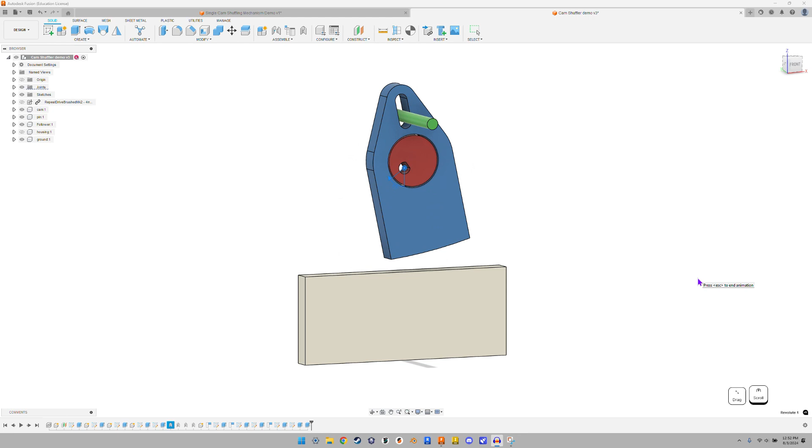Hi, in this video I'll show you how to make this single cam shuffling mechanism. Before I show you how to make it, I'll show you roughly how it works.

As you can see, there are three components: the cam in red, the follower in blue, and the pin in green. The cam is this circle here that converts the rotational motion of the motor, or what you're using to drive it with. It converts that into a walking motion.

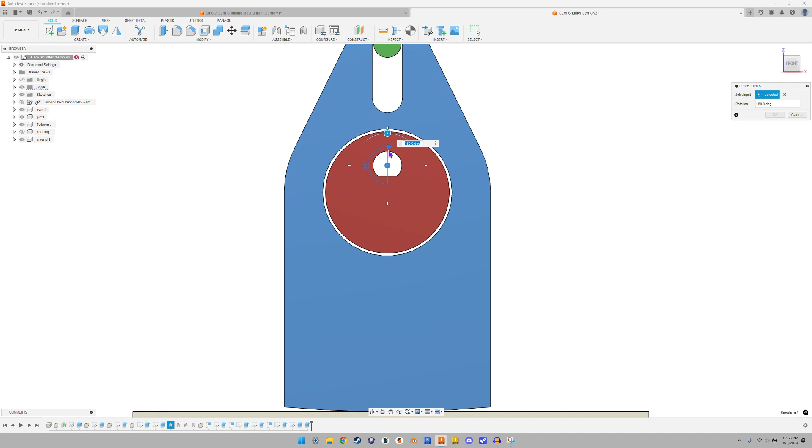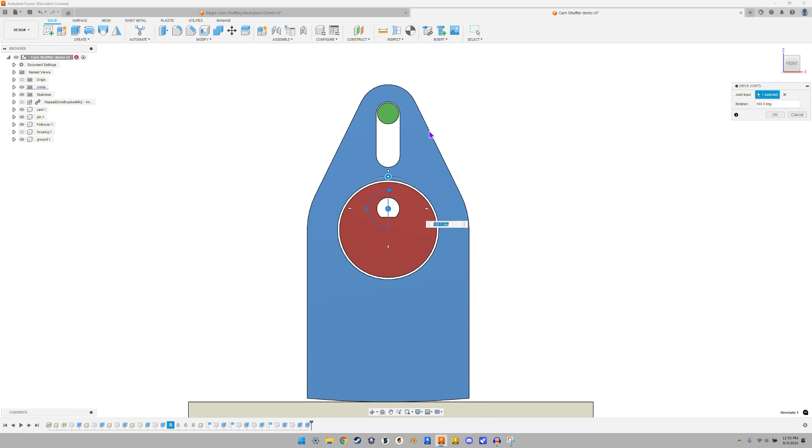The pin here in green, that's what the follower rides on; basically it just acts as a guide rail, and you can see how it follows it throughout the entire 360 degrees. And the third component is the follower. This is basically the component that links the pin, the cam, and the ground all together to create the motion.

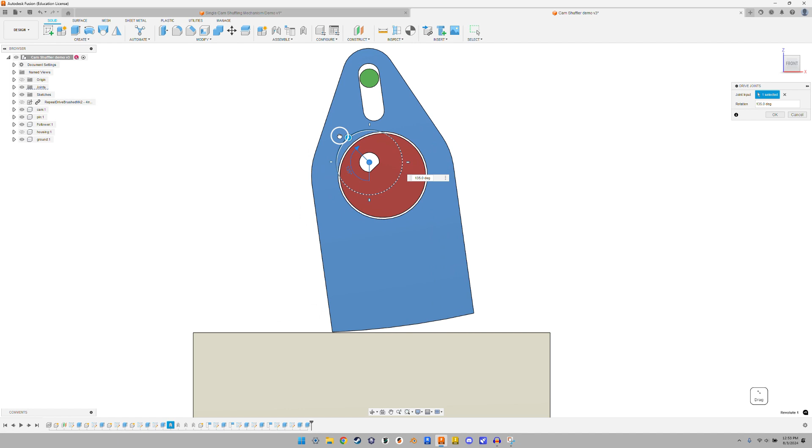And another important part about this follower is the foot geometry below. It has a very specific geometry that allows it to very smoothly walk across the floor, so you can see how it just glides across the floor, and I'll show you how to design that later. But yeah, this is the basic design.

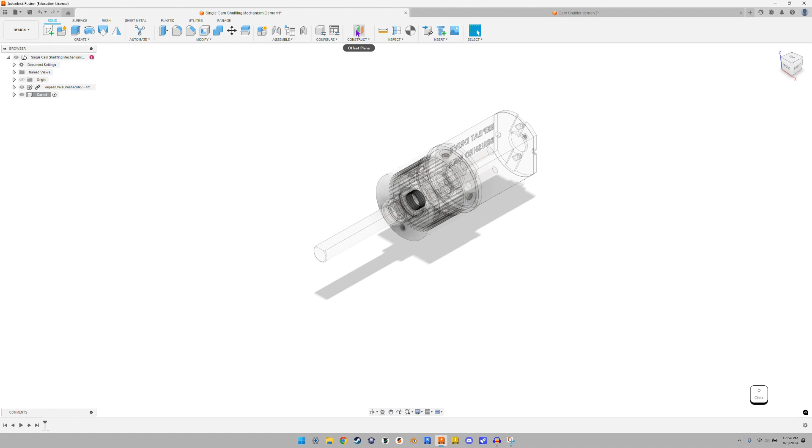So I'm starting out with this brushed motor. It's by Repeat Robotics, and it's for an ant weight. And I'll create a new component, and the first one I'll name it cam. And I'll create a construction plane to create my first sketch on. I'll project off of this, but I'll actually line it up with this face because that's where the D shaft starts. And that'll be good. And I'll create a sketch.

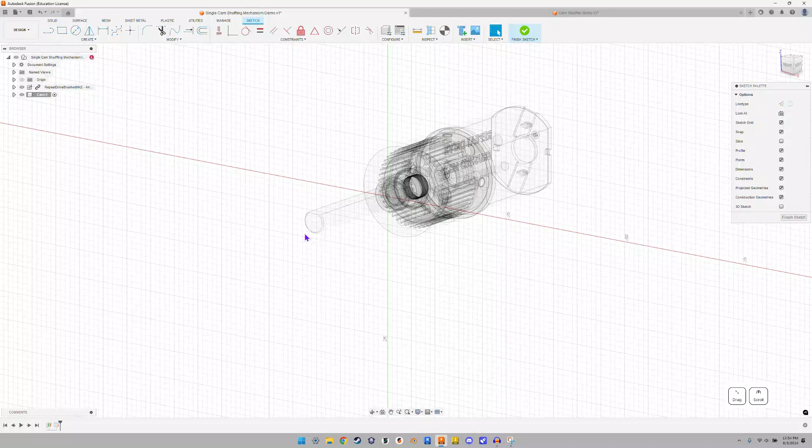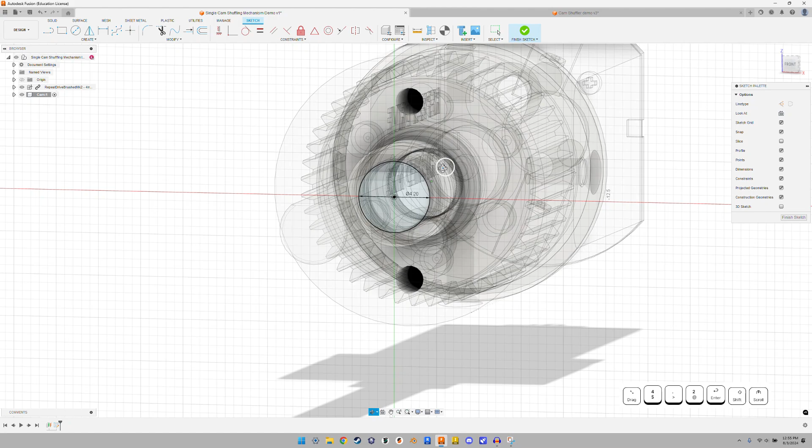And looking at the profile of this D shaft, I know that this circle here is 4 millimeters in diameter. I'm gonna add a slight tolerance, so it's a snug fit instead of being too tight. Now for the second dimension I will add a line across the top here to interface with the D shaft, so it actually can drive it instead of sliding.

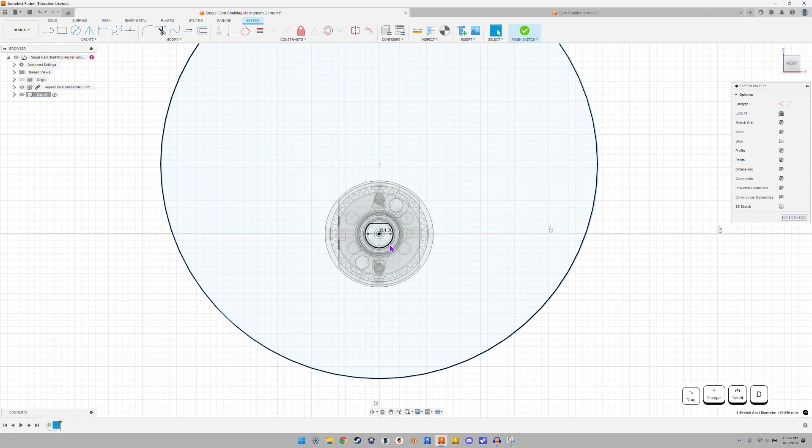Oh wait, and the next thing is the actual outside circle, and I'll just put this circle at a random dimension. The only thing that matters so far is that it's directly above the shaft, so you could add a constraint to hold that there. Actually, first I'll set the dimension in between the shaft and the circle I just created.

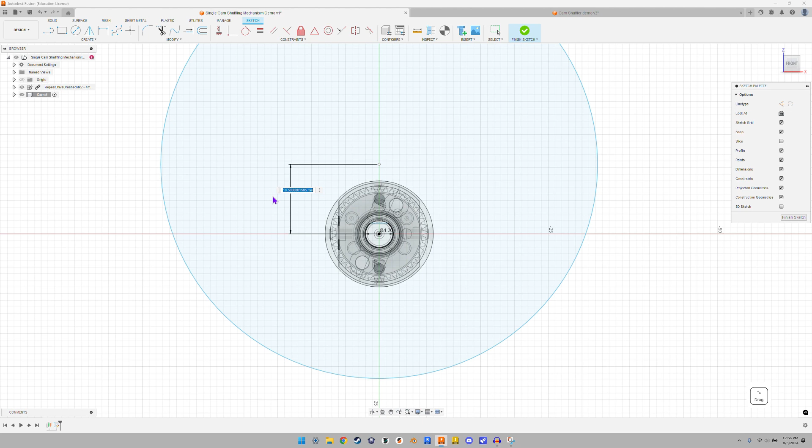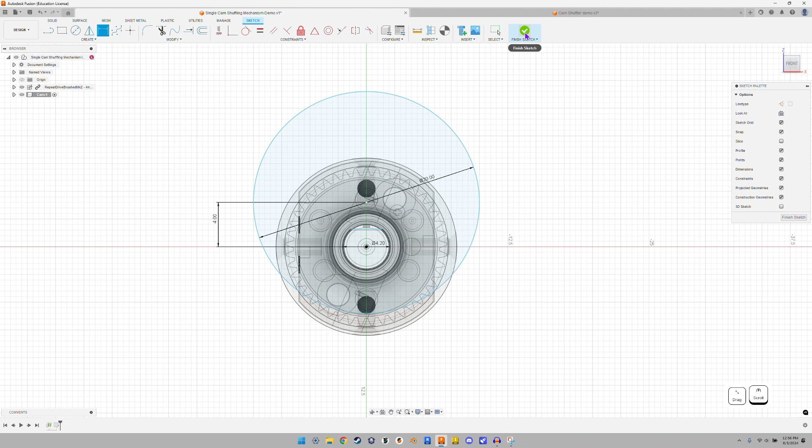Whatever distance this is going to be, that's basically your stride length, and however long your stride length is means how much of a step your robot takes per rotation. And for an ant weight, I'm going to stick with 4 millimeters. I'm going to set this dimension. I'll just set it to 20 millimeters. And that actually completes our cam.

And so I'll just extrude it. And I'm gonna extrude it 4 millimeters. However wide you extrude it, that's going to determine the width of each foot. So 4 millimeters works for me.

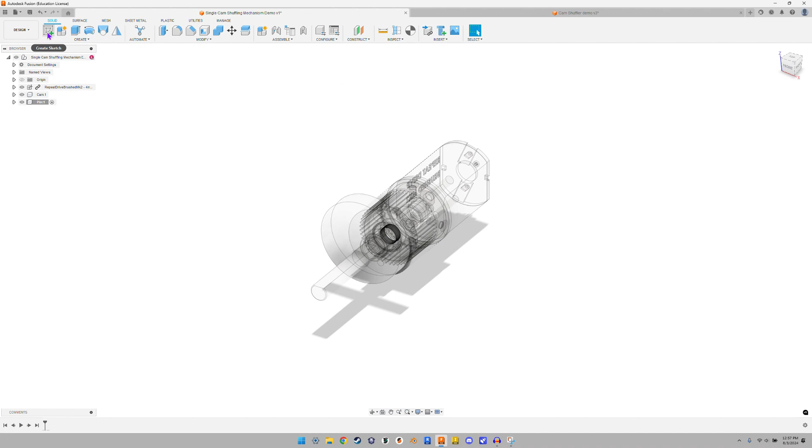Now the next thing I'm going to do is go back into all components and create the next component. And this one will be named pin. And I'll create a sketch. This time I'll just do it on the XZ plane. And I'll create a circle, just putting it randomly. Again, it's directly above the shaft and the cam that we just made.

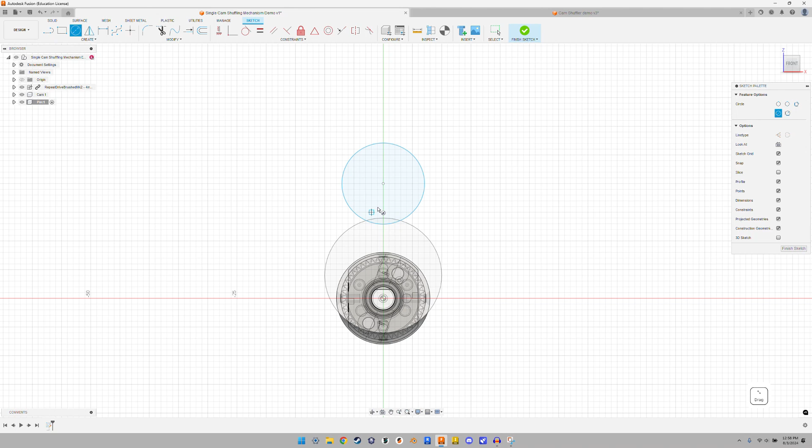First, I'll set its dimension, and whatever diameter screws or pins you have that you could use for this application, that's what you'd set this dimension to. Since I have 4 millimeter steel pins, I'll set this to 4.

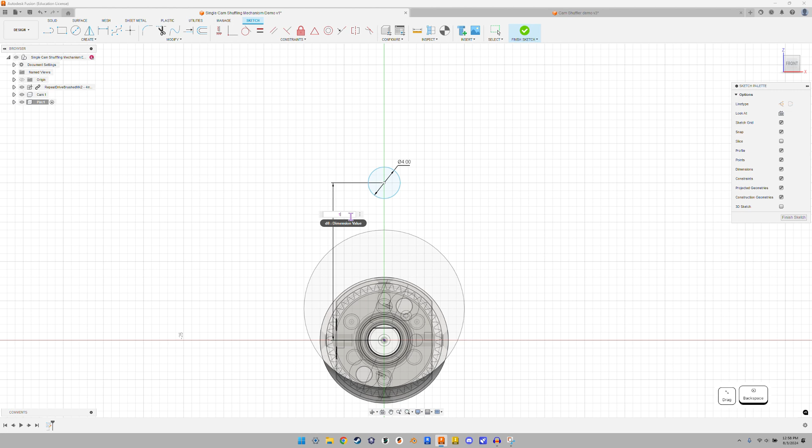And I will set this dimension from the shaft to the circle we just made. I'll just set it to 18. Actually, 19. Okay. And that's it for our pin. Now we will extrude it. I'll extrude to some random distance. We can edit that later.

Now the next component I will make is the follower. So I'll go back again, and I will create a new component.

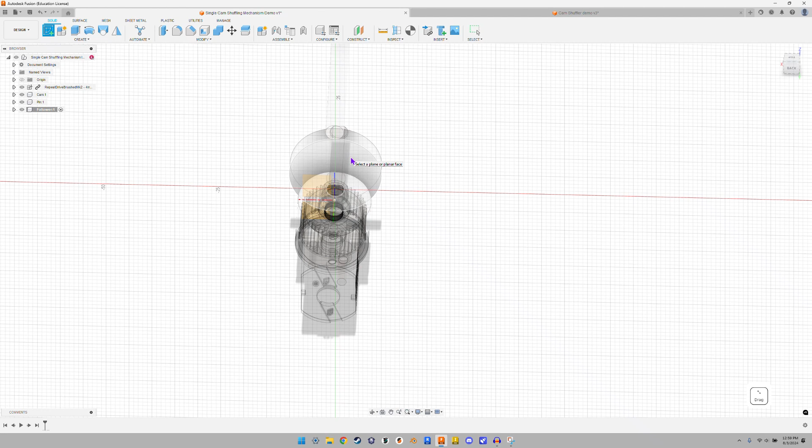Now I will sketch on this cam plane, just the back of this cam. And for now I'll hide the brushed motor to make it visually easier.

Now I'll create another circle. This will be the hole that is rubbing up against the cam, and I'll give it a slight tolerance, so 20.4 is fine.

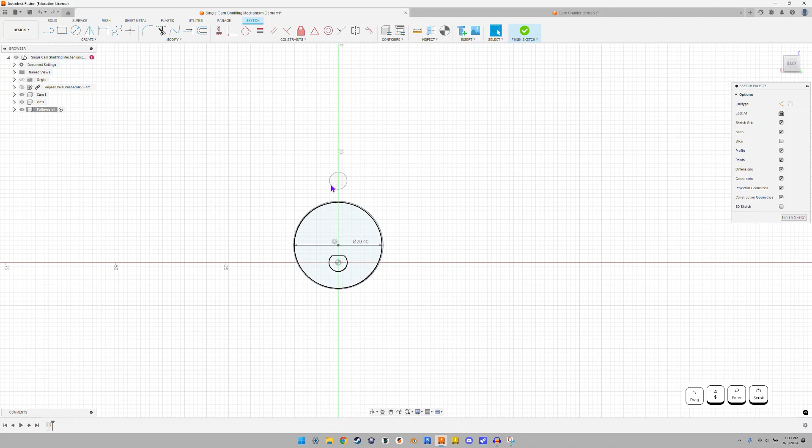Now the second thing I'll do is create a slot. This is the slot that interfaces with the pin.

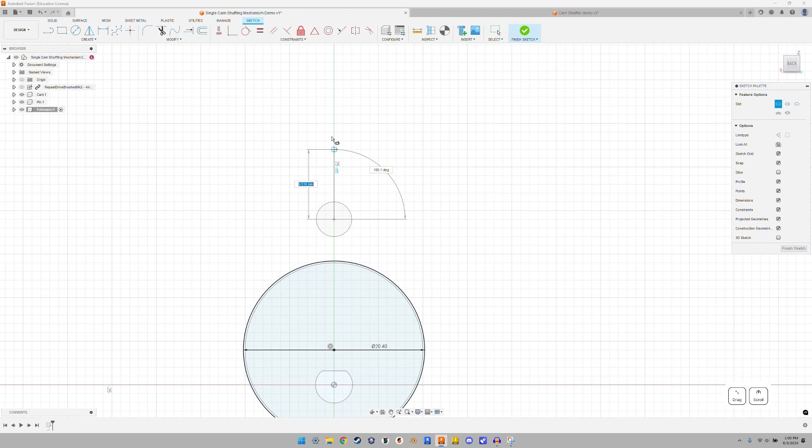Center slot. I'll start from here and go up a random distance, and I'll set this dimension to 4, then add a little bit of tolerance for 3D printing.

And I will set this dimension. This dimension is important. It'll actually be whatever distance the stride length of your cam is, multiplied by 2. So in my case this is 4 millimeters, so I'll set it to 8 millimeters.

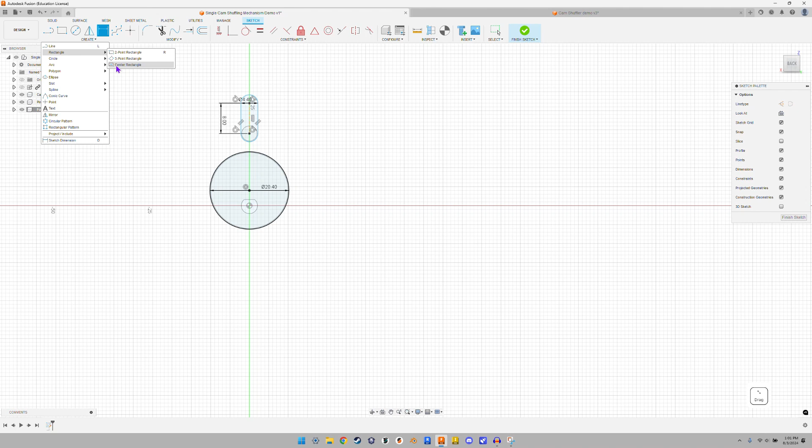And the third thing we're going to do is create this rectangle. These distances are fairly arbitrary, I just wanted it to enclose all of the sketches and dimensions we've just made. So I'll set this to 60 for now, and this to 30.

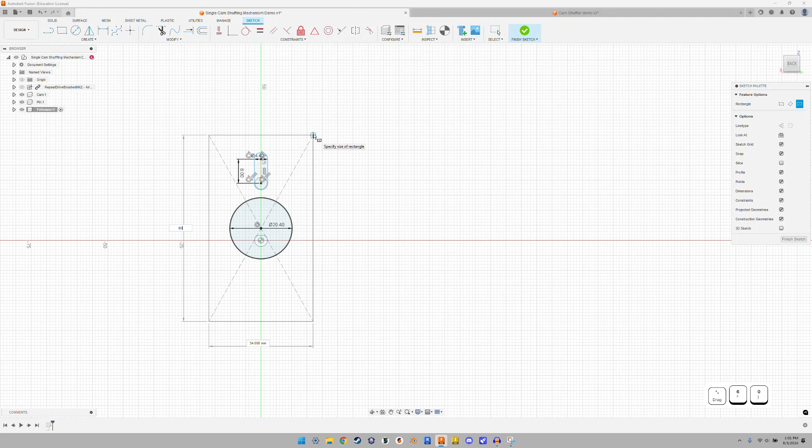We could be done with this for now, but just to make it look cleaner, I'll edit these dimensions to round it off and remove material, since a lot of this is unnecessary.

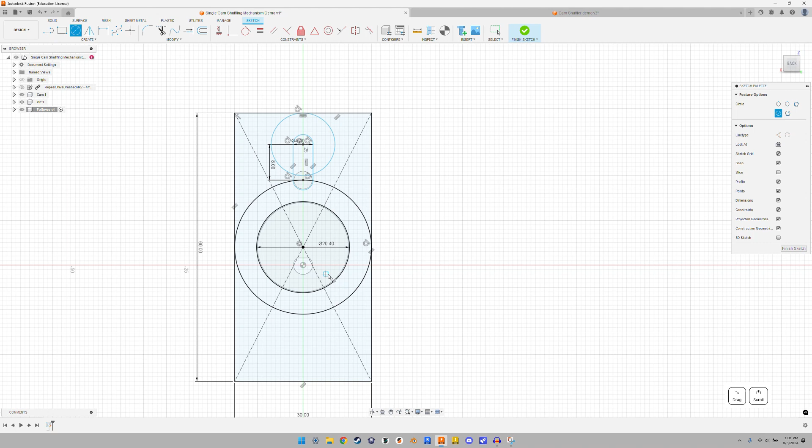That's fine, I'll finish the sketch. Now what we want to do is extrude the positive body. You'll notice this isn't a curved face yet, and we can't change that until we have a rotating model with joints and everything.

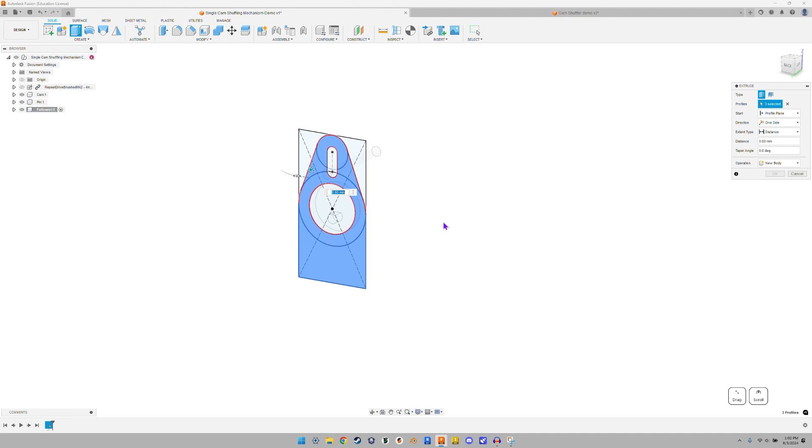So first I'll just extrude this. Again, it'll be the same width as the cam. And this is the basic body.

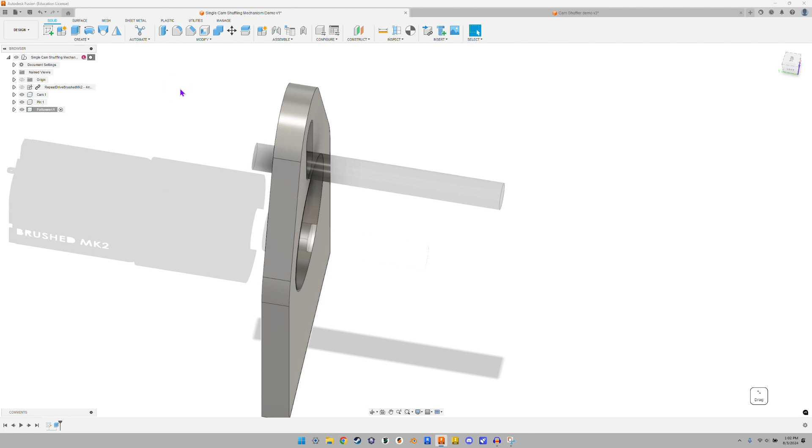And the last component I will make is the housing for the cam shuffling mechanism. This one is pretty basic, and we can edit it later.

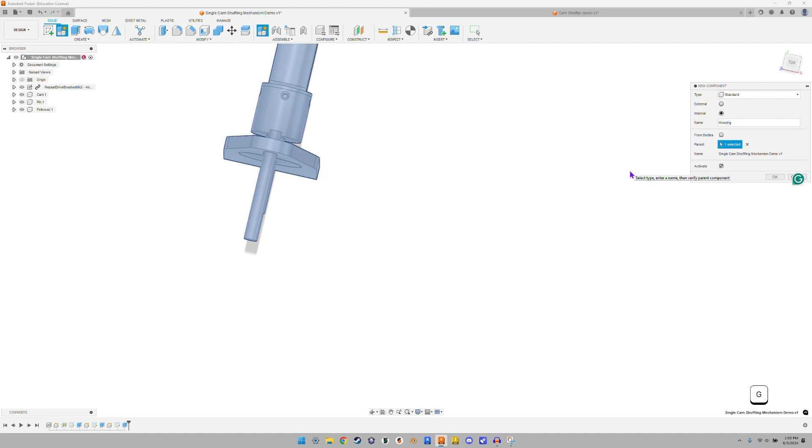And now the dimensions for this are somewhat important. First, I'm just creating a rectangle to base this off of, and I will set this symmetry.

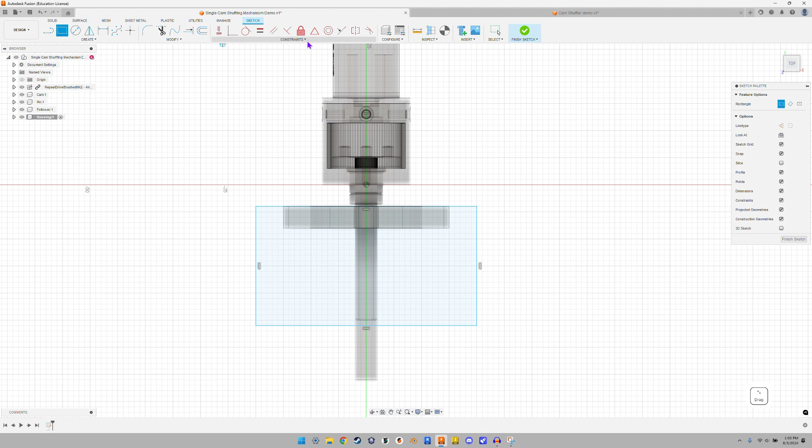I'll set this dimension. Actually, this dimension is already good. Basically, all I was paying attention to here for this dimension is I wanted the distance right here.

I basically just want to give it enough room to move, but not too much room where it's going to waste space, so 5 millimeters is fine for now. But once we get this moving with joints, you can actually see how much room it's actually taking up, so you can fill that in and optimize it.

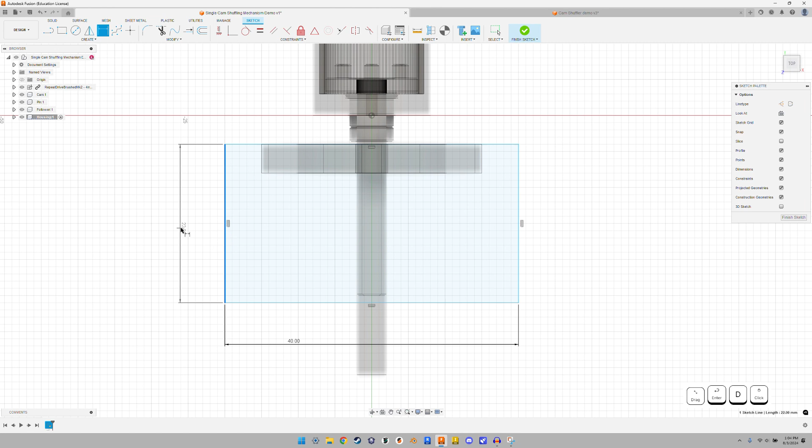So right now 40 is good for that dimension, but for this one I want to make sure that it is the width of our leg times the amount of legs we want to have. And the amount of legs you have basically varies how smooth the mechanism is, but you're trading that off for more parts, so it makes it more complex and more likely to break.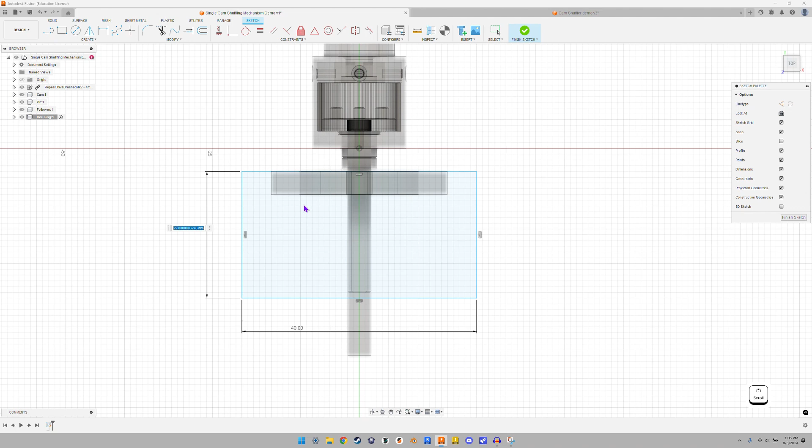But here, I know that I have a 4 millimeter wide follower, and I want 4 legs, so that's going to be 16 for now. And so this for me is complete.

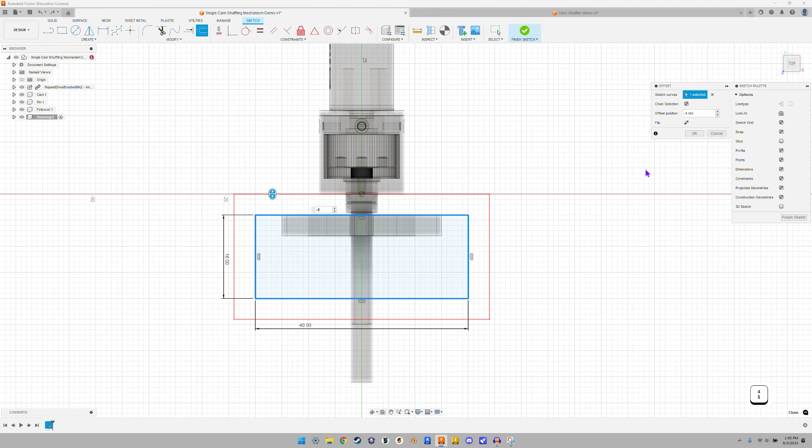Oh, I forgot, actually a more important part is offsetting this rectangle so it can actually make the solid body. But yeah, for now it's simple, but it'll be complete for now.

And I'll extrude this symmetrically. I just want to extrude this past the pin so it can actually hold onto it basically. 25 is fine.

And the last edits I'll make for this housing are the screw holes for the motor and the holes for the shaft and the pin, so I'll go in and do that now.

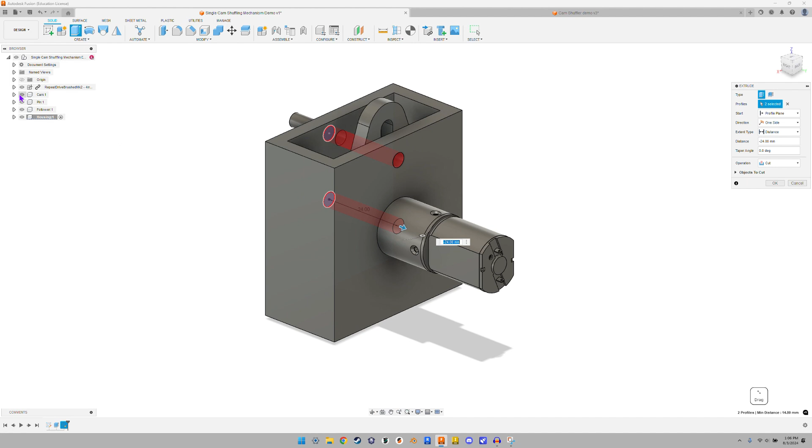Now I'm adding the holes for the screws.

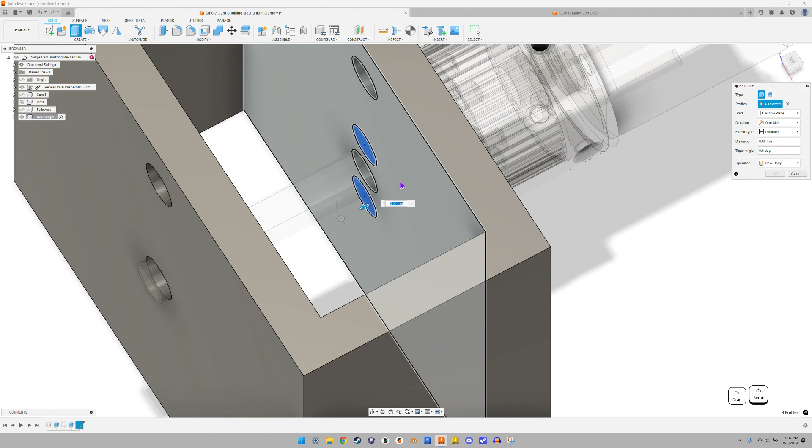And for this, I'll be doing two things with this profile. I'll be extruding the counter bore for the screws so that it sits flush with the mechanism so there's no interference. And the second thing I'll do is extrude all the way through this side of the body just so that we can actually access the screws with an Allen key when we need to assemble and disassemble it.

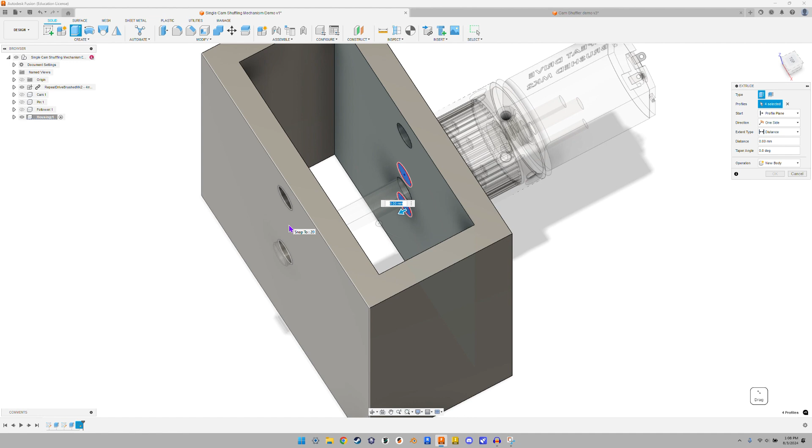So I'll do that now. And I'll actually make this two sides so we can do what I was just talking about.

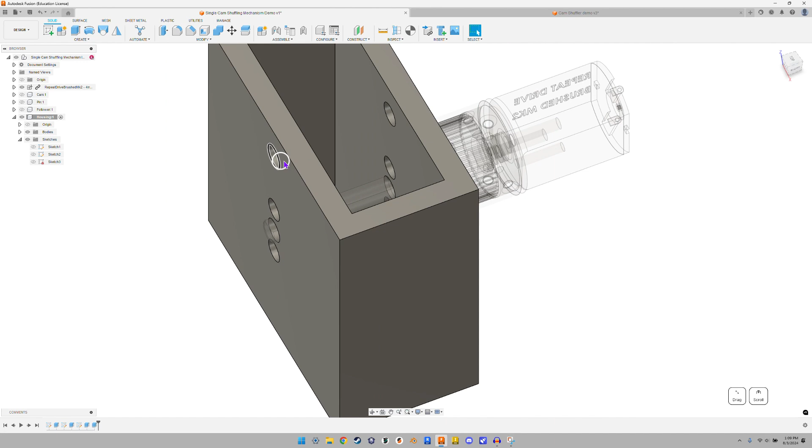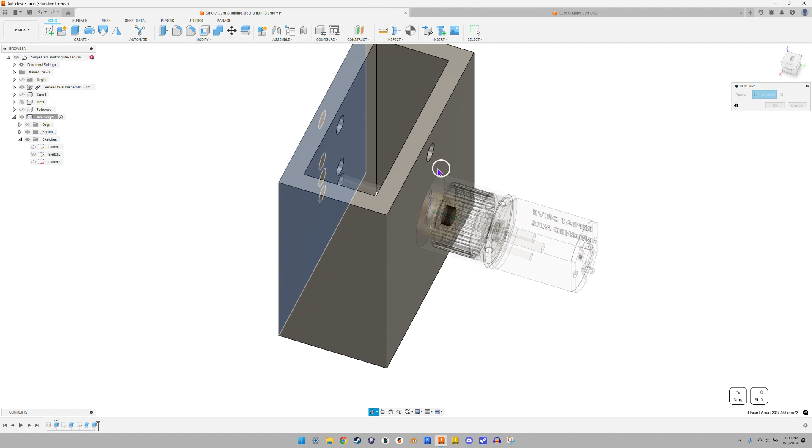So basically we need to, I'll escape out of that, and I'll create a plane. I want it to go, actually I'll create a mid plane, in between these two, and using this I'll split the body.

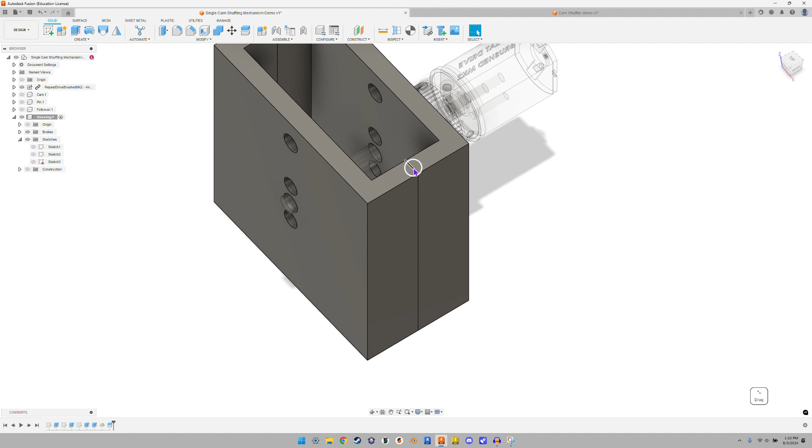And basically, all you have to do now is insert some screw holes so that when we need to take these two shells apart, we can do that. So I will just create some screw holes.

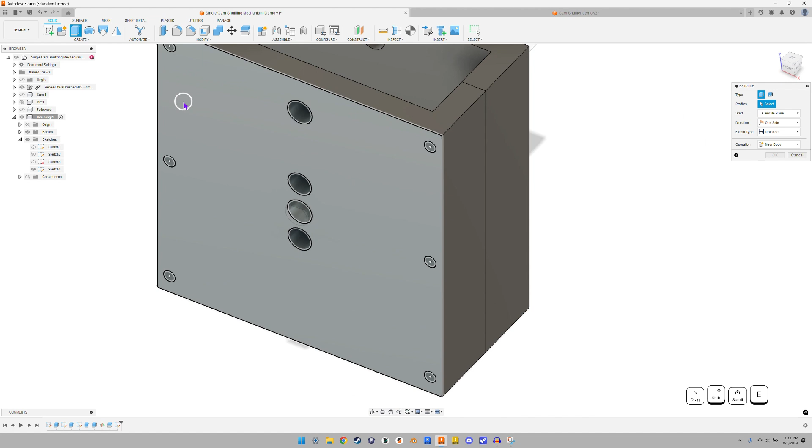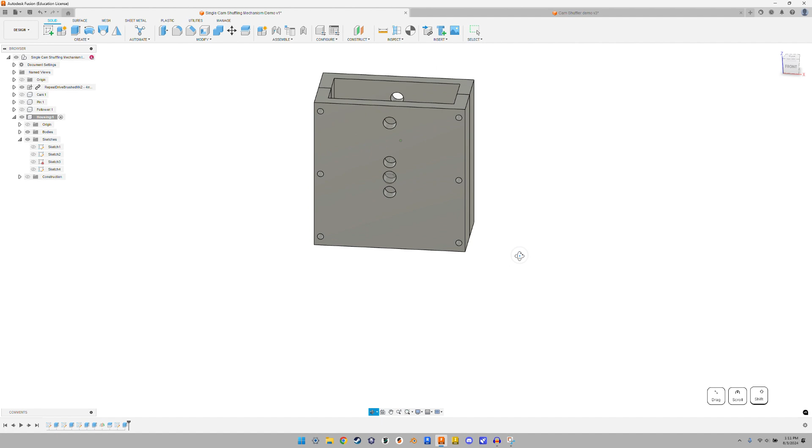Now that we have this housing done for now, we can go back into all components, open these back up, and now we're actually going to create the joints.

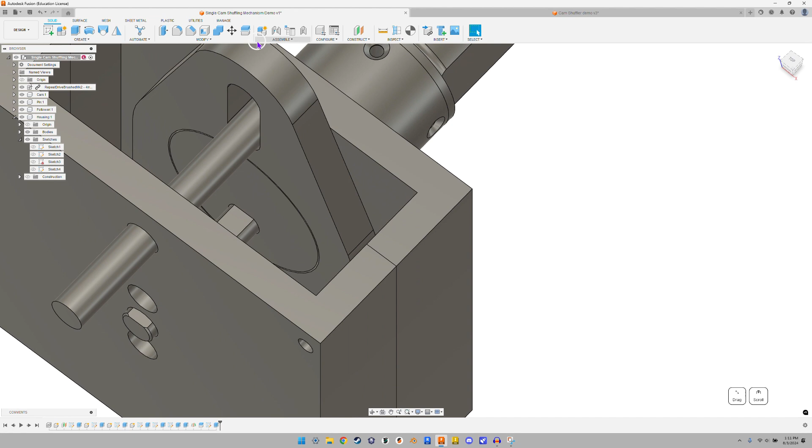For this I'll be using all as-built joints since all of the components are already in the correct orientation that I want them in.

The first one I'll do is between the housing and the cam, and the revolute joint will be around this axis.

Basically when you do these as-built joints, sometimes you'll have the wrong component spinning. I want the cam spinning, not the housing. If you go back and cancel, it just means I selected them in the wrong orientation. You're supposed to choose the one you want moving first, then select the stationary component second.

This will be a revolute, of course, and now you can see that the cam is spinning and not the housing.

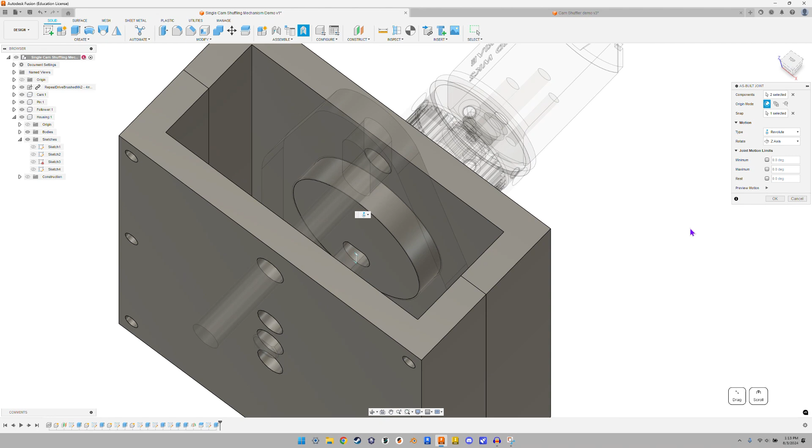I'll create another as-built joint on the follower and then the cam. It'll be on this circle, the outer edge of the cam.

The third joint I want to make is between the pin and the housing.

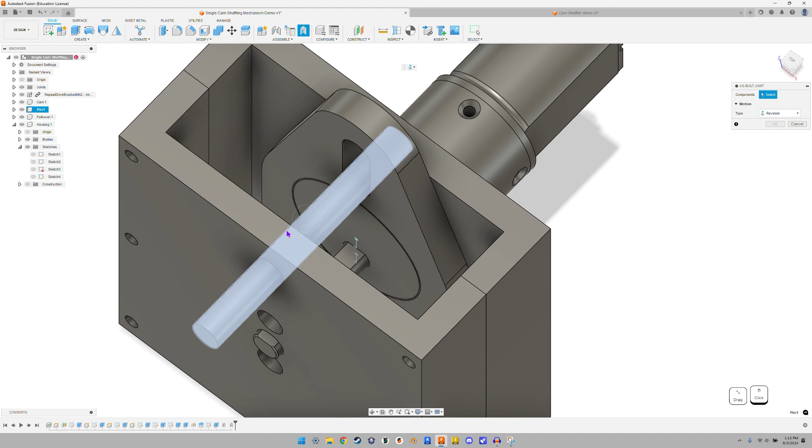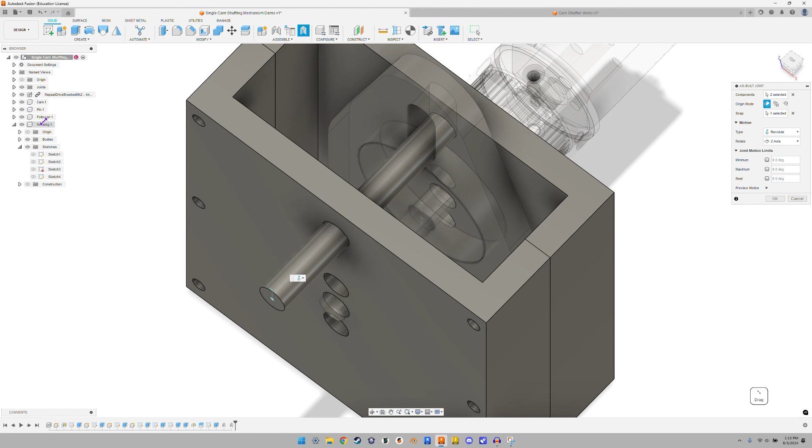You won't actually see the pin moving—it's very faint, but the pin is supposed to be moving. This basically just helps us create the animation, but in real life this won't actually be spinning. It'll stay in place while only the cam and the follower are actually moving. So that is good.

The last joint I'll make is between the follower and the pin, and this will be the only slider joint in this tutorial. That slides up and down. That looks good.

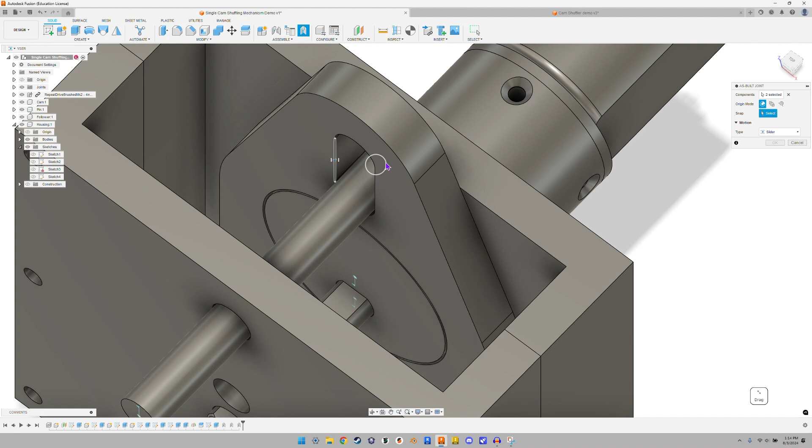If you go into the joints up here on the left, you can go to revolute 4, which is what I want, and I'll hit animate joint relationships. So this is what it should look like.

The only problem with this is I just noticed that when it's spinning, both the follower and the housing are intersecting. What you can actually do is either widen the housing, or cut off parts of the follower.

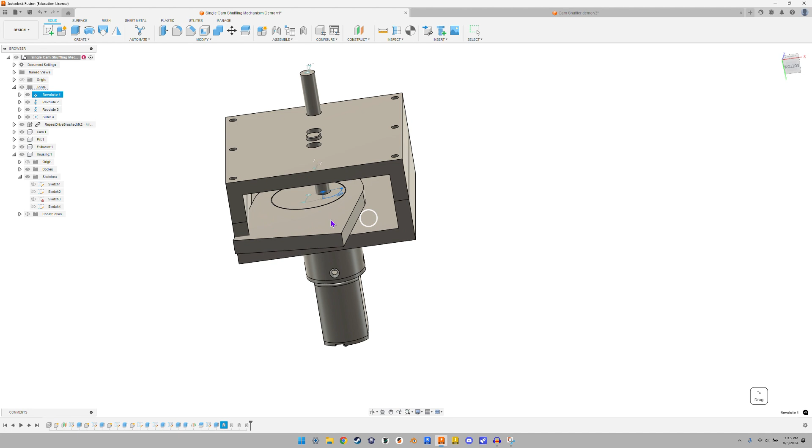For this, I'll actually be cutting off parts of the follower just because it's easy. Basically this just helps keep everything compact and as space efficient as possible.

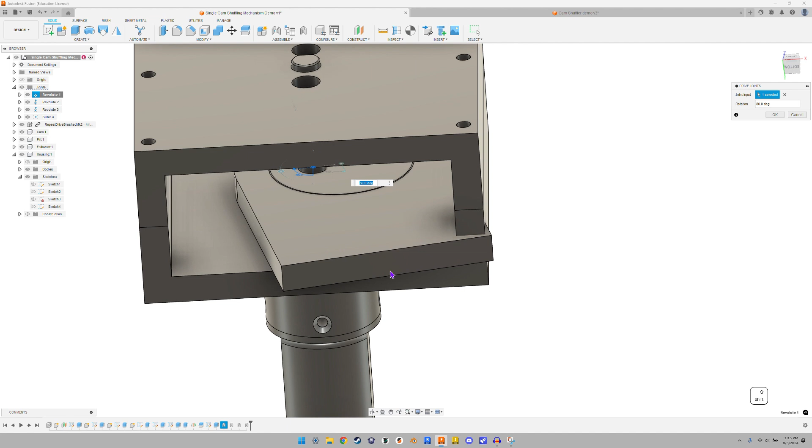I'll hit escape, then right click this and go to drive joints. Basically as soon as it stops moving laterally, I will pause it there.

You can see in this motion it's moving across, then it stops, and then it starts to move down. Right as it stops, that's what I want to leave it at.

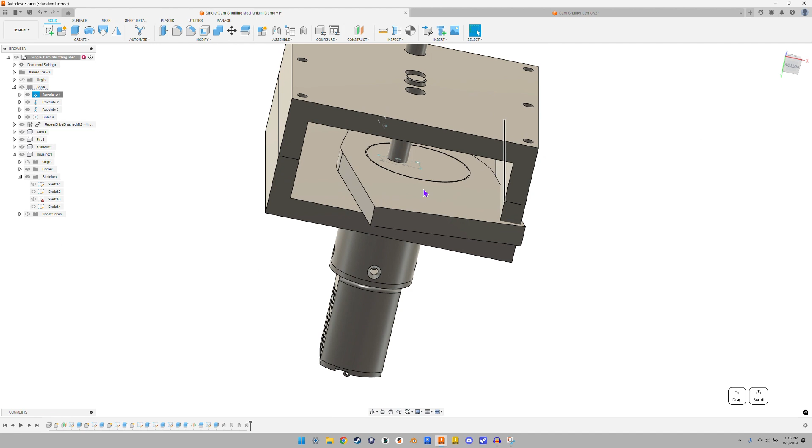For me, this is good. I will edit the follower, create a sketch, and we want to capture the position that we just made.

I'll project the housing, project this inner wall, and turn this projection link off so we can extend it.

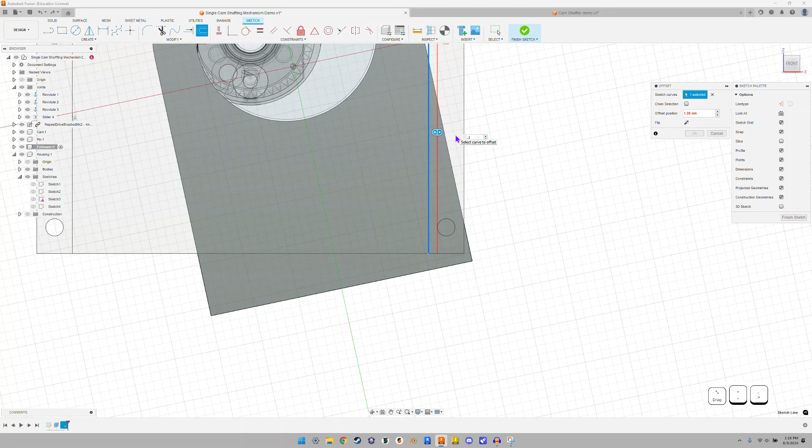Then I will just offset this by—that's not right. First I'll offset this, let's turn that off, it's very finicky. Okay, I'll just offset this by -1.0. This will just give me a little tolerance, a little bit of room for error.

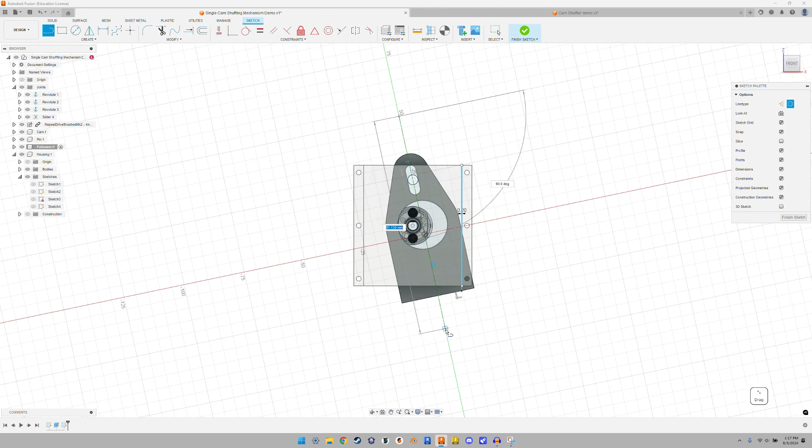So now this is the only line we really care about. Now I will create a line to mirror it off of, a center line. I'll just drag this across, and I will mirror this center line. Since I made this a center line, Fusion already automatically knows that this is the one I want to mirror it off of, so it's just a nice convenience.

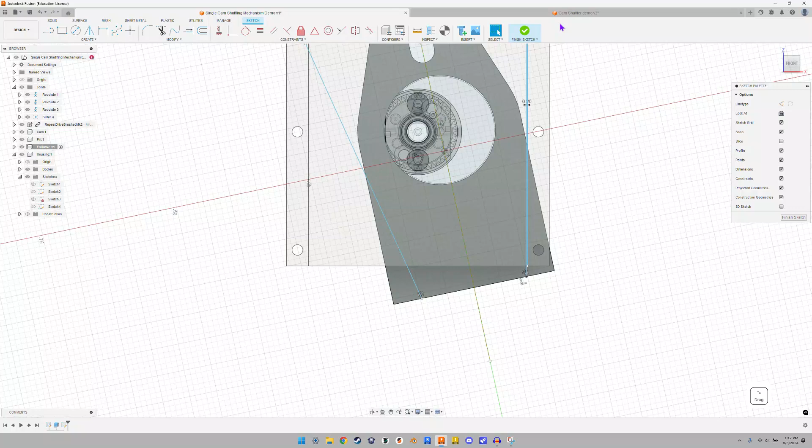So this is done. Now I can extrude this. Oh, no.

I can extrude this through, but for some reason Fusion always intersects. It always edits other components too. I'm still needing to figure that out. If you know why, please leave a comment down below.

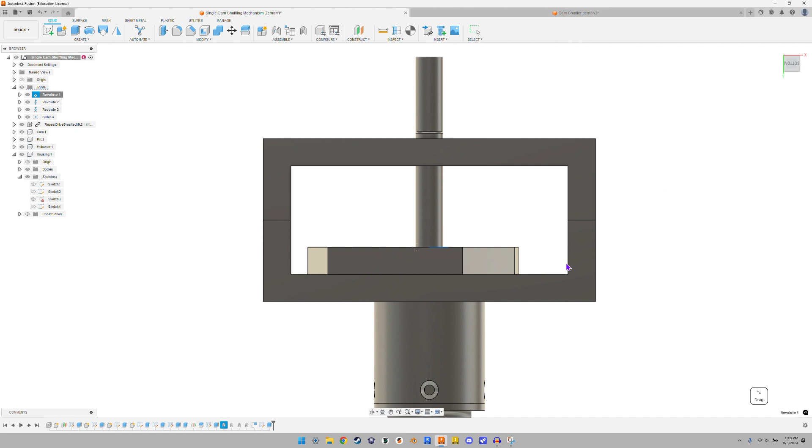But I will go back, and so now if you go into all components and you animate the joint relationships, you can see that from a side profile it doesn't actually intersect. There's a little bit of a gap, and that's exactly what we want. And so now that part is done, but you still might notice that this isn't curved geometry yet, so that's what we need to do next.

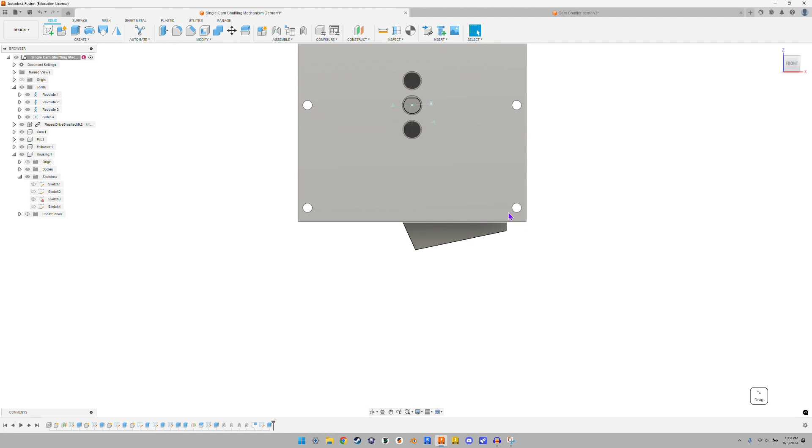We actually need to create the ground component first. This is the floor that the robot will be walking on, and this body will just reference it. So now I will create a new component, and I will label it ground.

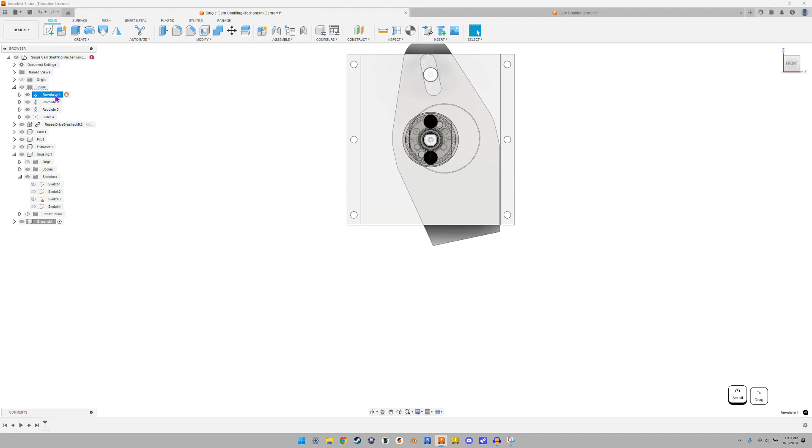And to find where the ground will be, I actually need to drive this joint, and I will set it to 180 degrees because this is where the leg is fully extended. It can't go any further.

And I will create this sketch on this plane. And now I'll just create this rectangle. Doesn't matter what size it is, really, just big enough.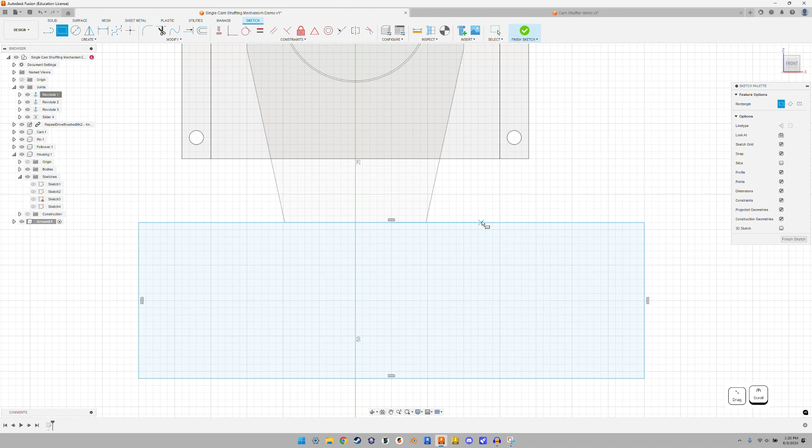The only thing that matters here is that the leg of the mechanism and the ground, the top of the ground, if they are collinear, then that's how we want it. So this is good. I'll just finish the sketch, and I'll extrude this out just far enough.

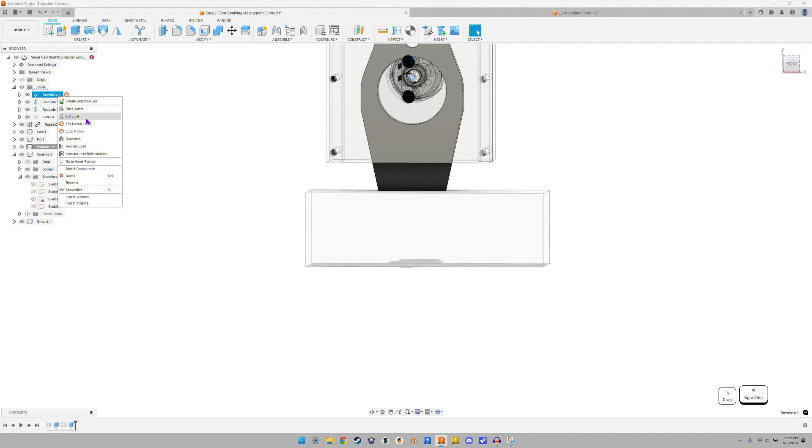And so now here's where we edit the follower. And with the follower, we actually want to drive this joint until it stops moving across and starts moving up.

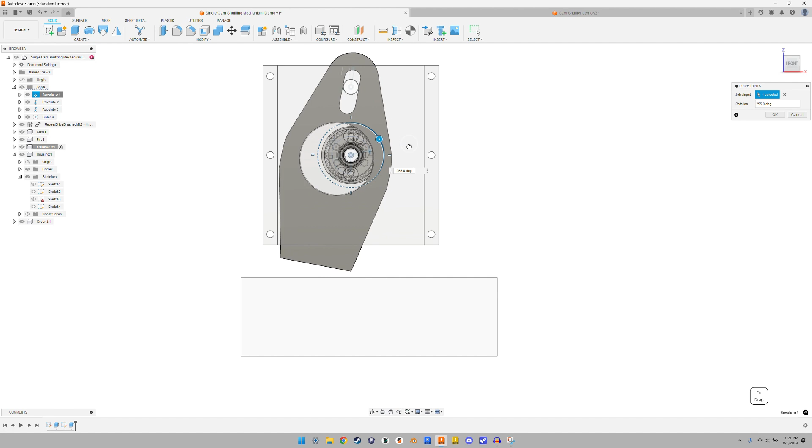So I will look at that here. Basically for me, I think it stops at about 270 degrees, and then it picks up the foot. So that's what I'll pause it on, but it might be different for you.

And I will create this sketch on here. And I'm going to project this line, making sure that the projection link is off so we can edit it however we want.

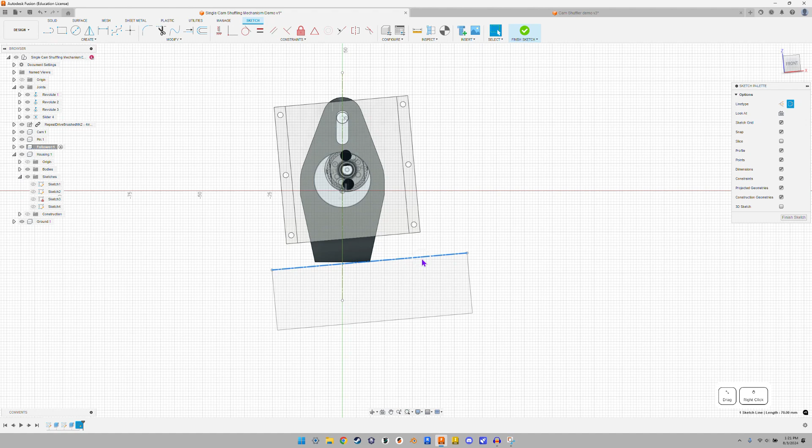Now I'll create a line to mirror this projection line across - a center line. What we actually want to do is right click this and make it a construction line. So this line is what we're going to mirror this line across, this center line. So I'll do that.

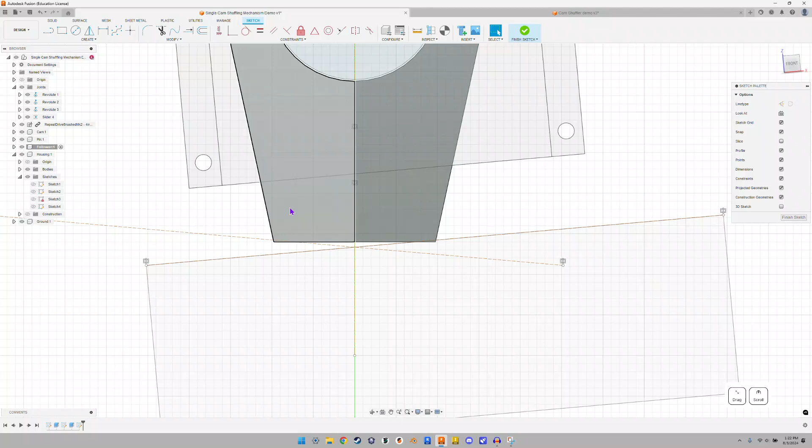And the last thing I actually want to do is fix these in place so they can't move at all. For some reason Fusion 360 doesn't like it when there's a symmetry constraint and a lock constraint, so right now I'll just go ahead and delete those. So those are gone.

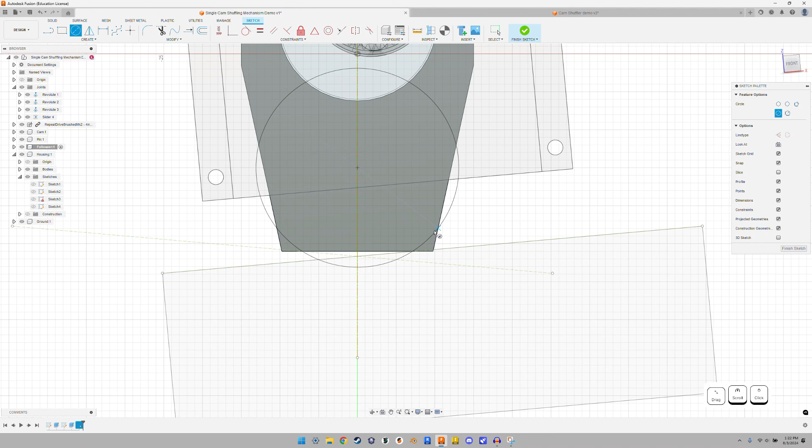Now the last thing we want to do is take this circle, it's just a random circle, and I will make it tangent to this line. I'll tangent it to the other line, and then the last line I'll tangent it to is the foot of the shuffler. So now when you're done, this circle will usually be very large, but it should look something like this. It's a very slight curve.

And so now we will extrude this. So it just cuts off this little bit.

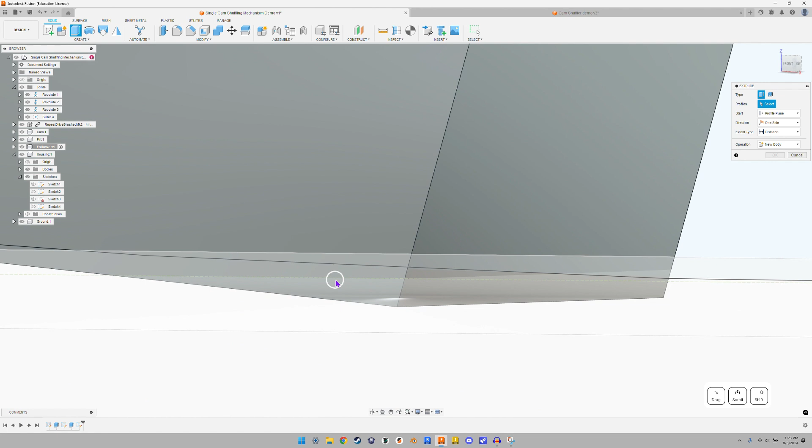Fusion 360 has been acting very laggy today. I'm not sure why.

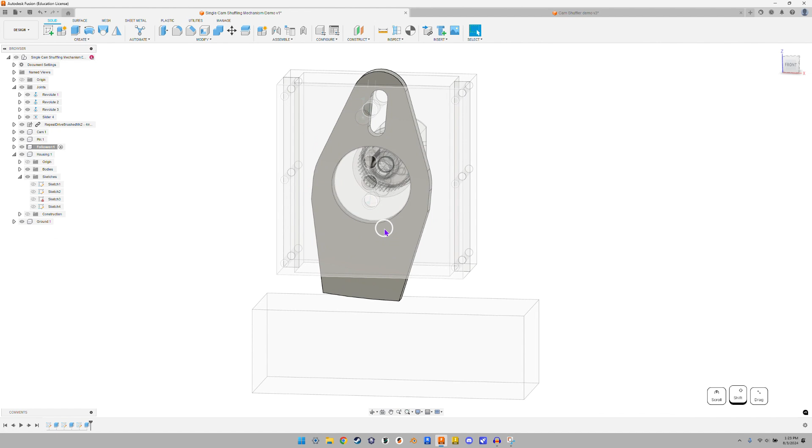Okay, there. And I just want to turn off the ground so it doesn't cut into other components. So here is the basic mechanism pretty much complete. If I go into all components, and for now I'll hide the housing so we can see the internals.

And you play this animation, you can see how it basically just glides across the floor. And you can tweak this however you like.

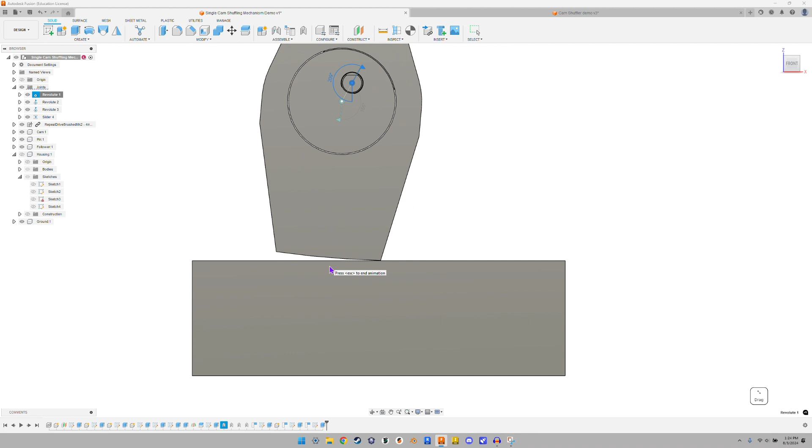That's pretty much it. This is the basic mechanism. This is not a complete thing that you would just print out or have it manufactured. Basically, there's a lot of places where you need to hollow out material, or you would need to just optimize it for strength. But here is the basic mechanism, and this works for me.